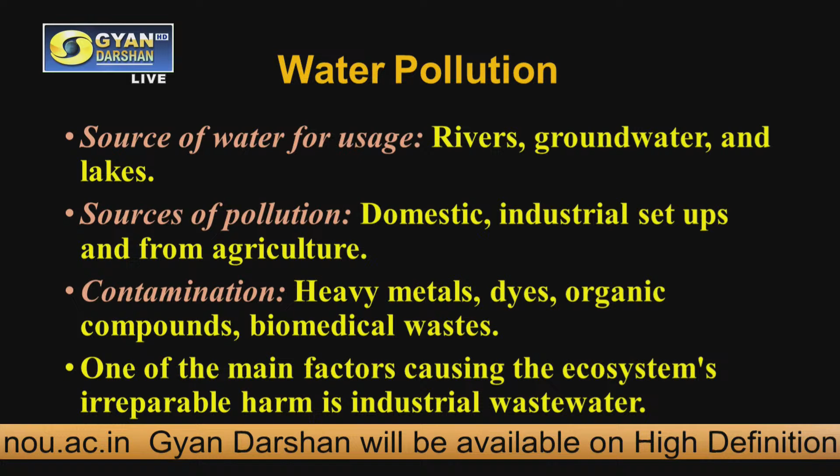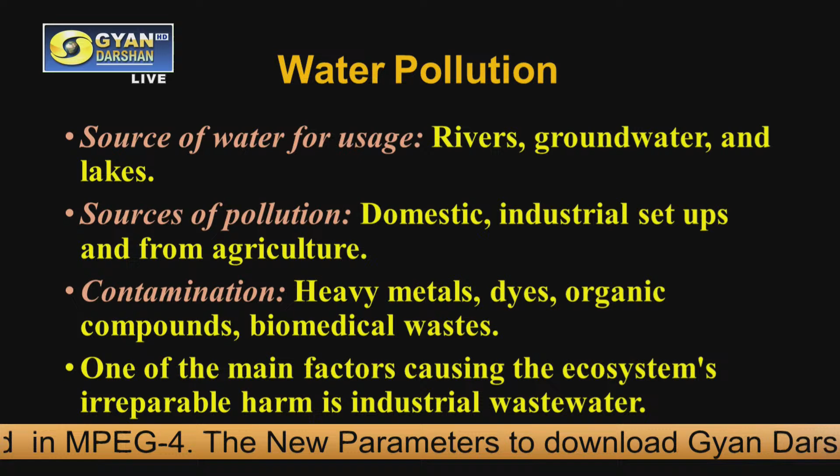This comes from rivers, groundwater, or lakes. In brief, the sources of pollution include domestic pollutants, industrial setups, and also the agricultural sector. Contamination of these waters could be due to heavy metals, organic dyes, organic compounds, and also biomedical waste which can enter the system through hospital waste and healthcare facilities. So one of the main factors causing irreparable harm to the ecosystem is industrial wastewater.

This is the state of our rivers today. Another case study: chromium and mercury are entering the residences of people in Kanpur. The soil, groundwater, and surface water in Kanpur Nagar, Kanpur Dehat, and Fatehpur were all found to contain heavy metals much above the permissible limits. This is again a report from Down to Earth, from the CSE, in December 2024, just 4 months before.

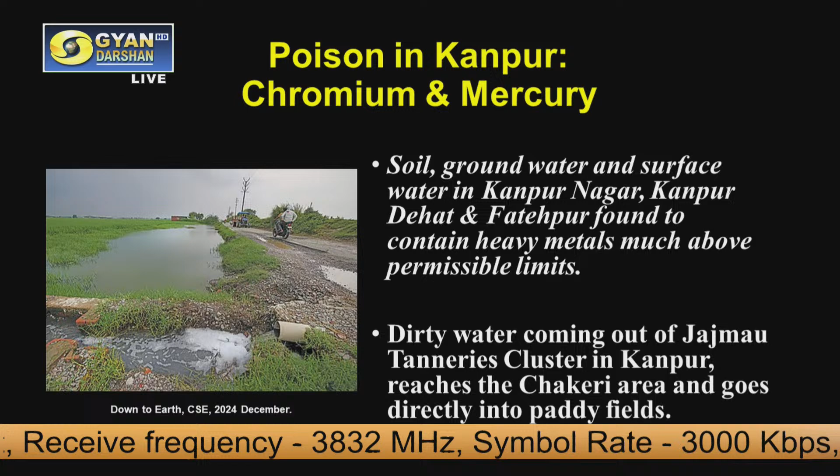The dirty water that comes out of the canals near the Jajmau industrial cluster area in Kanpur reaches a specific area, the Chakeri area, and then directly goes into the paddy fields where agriculture is being practiced. So what happens when these waters enter the agricultural field? No wonder the rice that is being grown there, or any other food item and agricultural product we get, is contaminated with these heavy metals.

So the food chain is affected and biomagnification occurs, with toxic chemicals being concentrated in the food chain. Human beings, animal health, marine health, plant health, environmental health - everything is being degraded. At what cost?

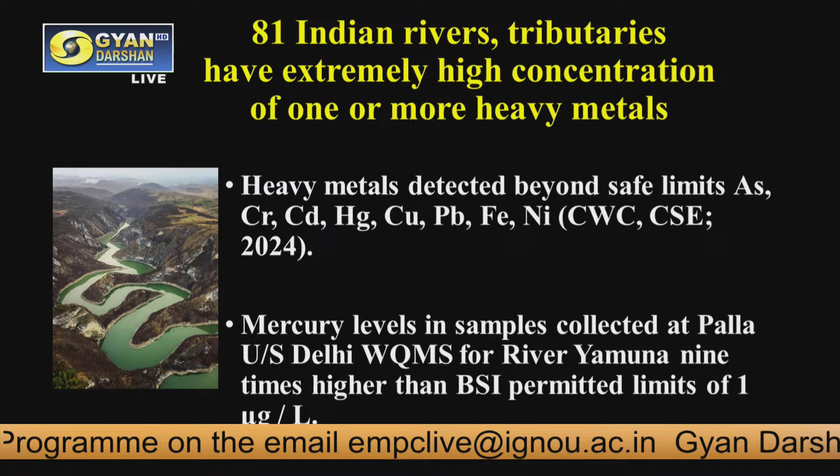See the next example: 81 of India's rivers and their tributaries have extremely high concentrations of one or more of the heavy metals. What were the heavy metals that were reported and observed? They include arsenic, chromium, cadmium, mercury, copper, lead, iron, and nickel.

This is again a report which came in August 2024 in Down to Earth, and the mercury levels collected in Delhi in some areas of the river Yamuna were 9 times higher than the Bureau of Indian Standards limits, crossing the permissible limits.

So having given you an outline of the present status and the recent reports and publications in the water and toxicological journals, we now have to understand that treatment of these water bodies, treatment of industrial or domestic wastewater from any industrial setup, is highly essential. And now let us see how we go about treating these toxic wastewaters.

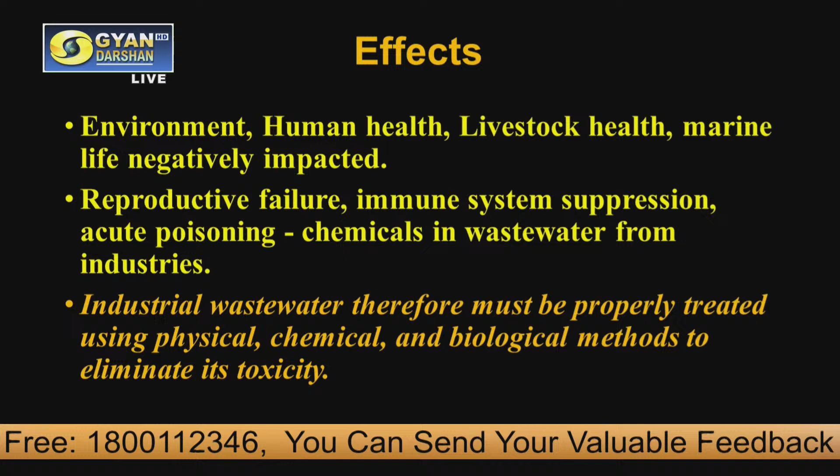The effects will directly affect the environment, human health, livestock health, and the marine environment; all are negatively impacted. Reproductive failure, immune system suppression, and acute poisoning are also reported in some cases. Why? Due to the chemicals present in these waters. Therefore, industrial wastewater should be properly treated using physical, chemical and biological methods in order to eliminate its toxicity completely.

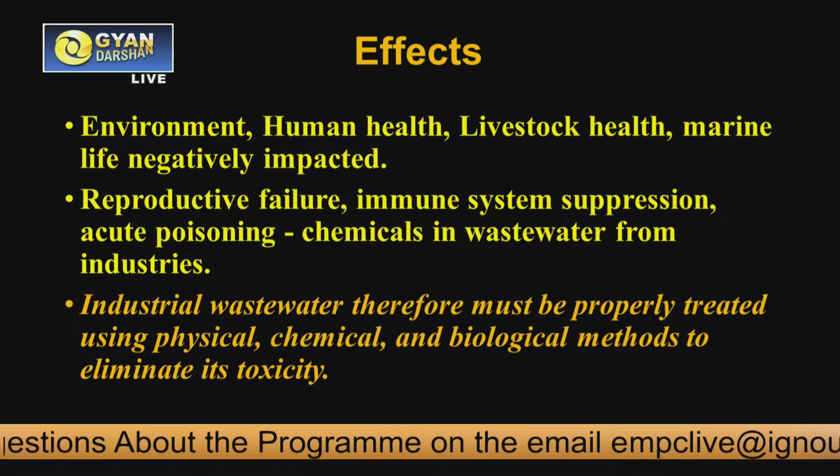Now let us see the characteristics of industrial wastewater. If we classify them into physical, chemical and biological, from the physical appearance you can see the color of the water. For example, if it is a textile dye, you can see whether the color is orange or pink, which indicates the level of pollution. Then the odor, the turbidity, the temperature of the effluent, and the total solids present in the waters.

Then the chemical oxygen demand, total organic carbon, nitrogen, phosphorus, chlorides, sulfates, acidity and alkalinity, the pH, and trace and heavy metal estimation form a very important part of the water chemistry parameters being analyzed.

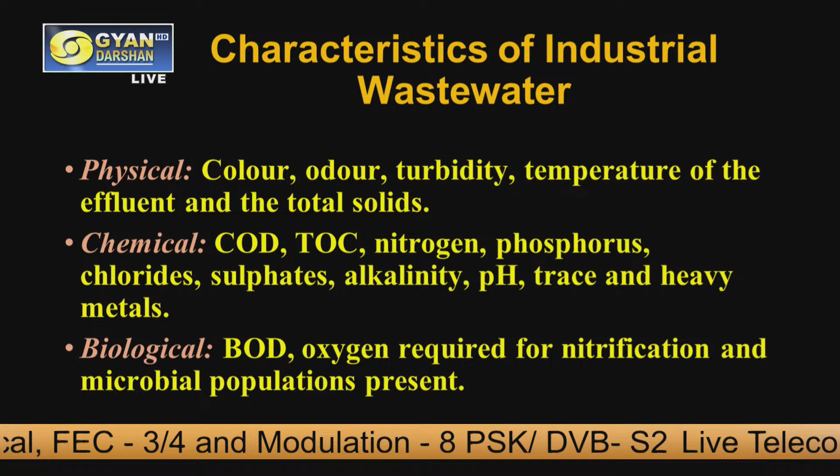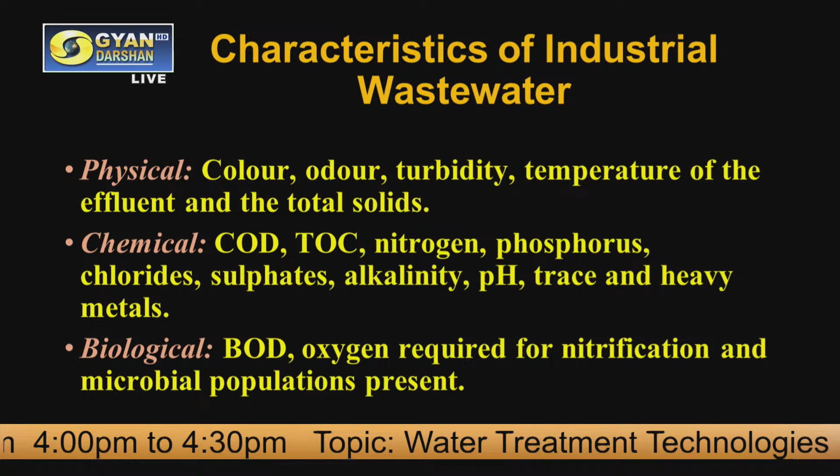And finally, in the biological studies, the toxicological studies are very important: biological oxygen demand, the oxygen required for nitrification, and the microbial populations present. All these parameters reflect the water quality, and thereby you can decide how far and how best you can treat these industrial waters.

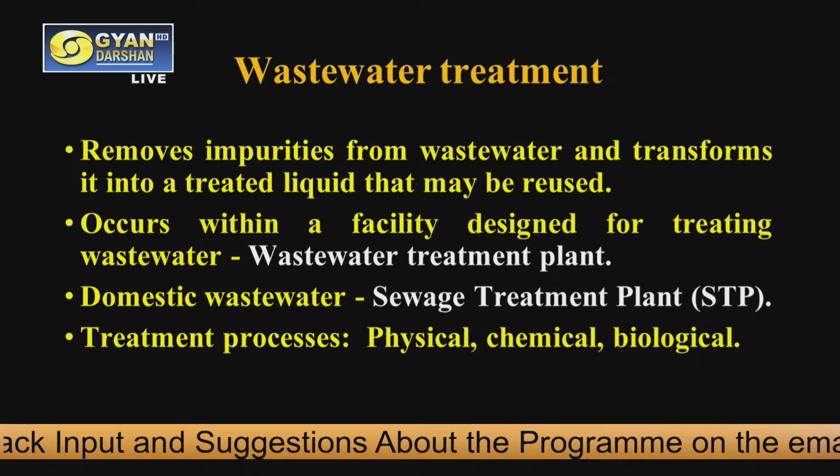So how do we define waste treatment? Waste is a contamination, which is contaminated or polluted water in the case of wastewater. This treatment procedure is a process that removes the impurities from the wastewater and transforms it into a treated liquid that may be reused.

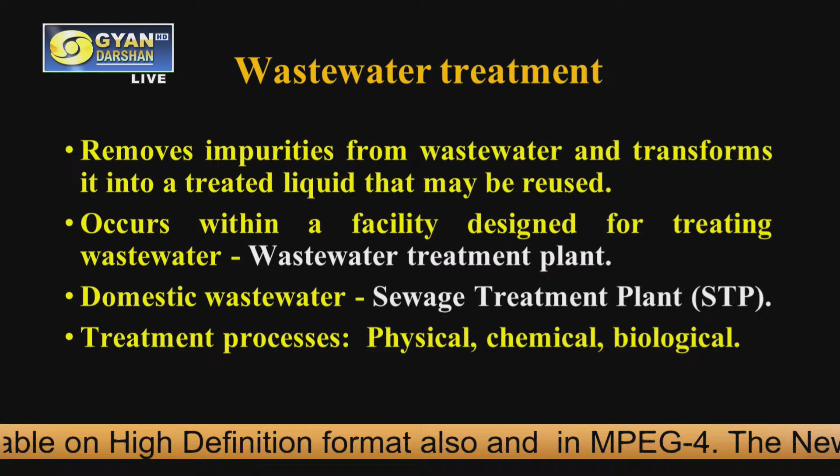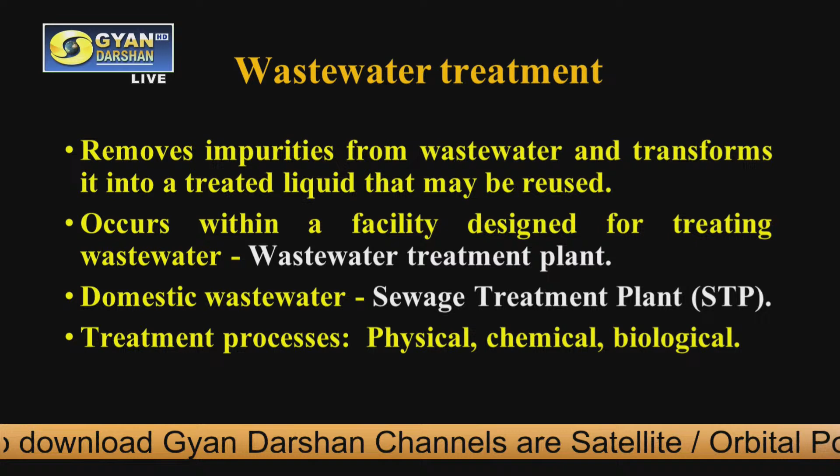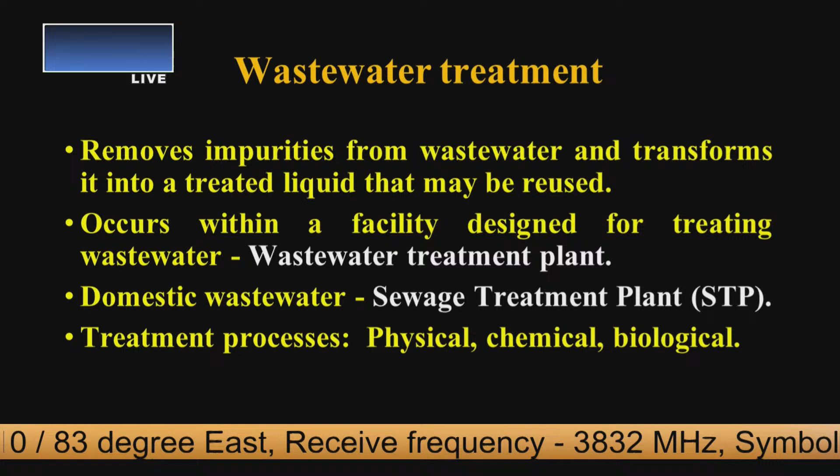This can occur within a facility designed for treating wastewater, often referred to as the wastewater treatment plant. If this facility treats domestic sewage, then we refer to it as the sewage treatment plant or STP. The treatment process encompasses physical, chemical and biological processes for effective elimination of the contaminants.

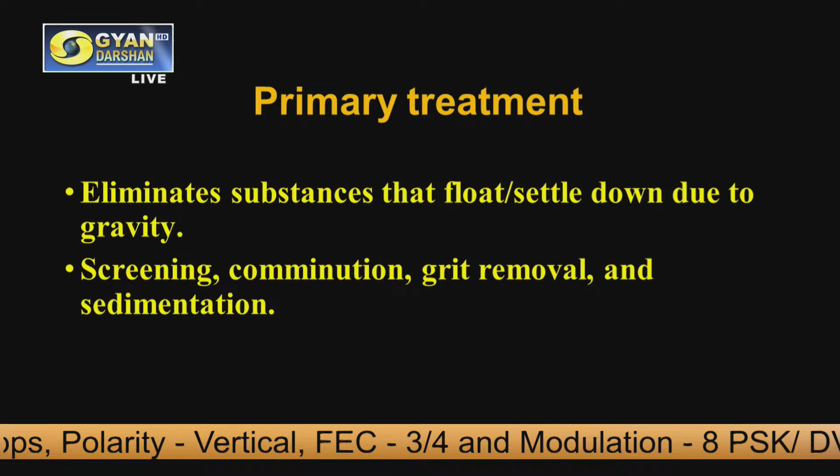Let us go on with primary treatment, the first step, which eliminates all substances that float on the water, for example oil or greasy substances, which can be skimmed away using certain tools and equipment. Then we have settleable solids, solid material which settles to the bottom of the tank or equipment, and can be taken out using certain tools.

So the primary treatment itself removes the larger particles, for example pieces of wood, leaves, twigs, or plastic material, and it can remove around 30 to 40% of the suspended matter and also the BOD.

Now, in the primary treatment process, we have several steps. The first step is screening. Then we can use comminutors, which grind or reduce the particles to smaller size for convenient removal. Then we have grit removal and the sedimentation process.

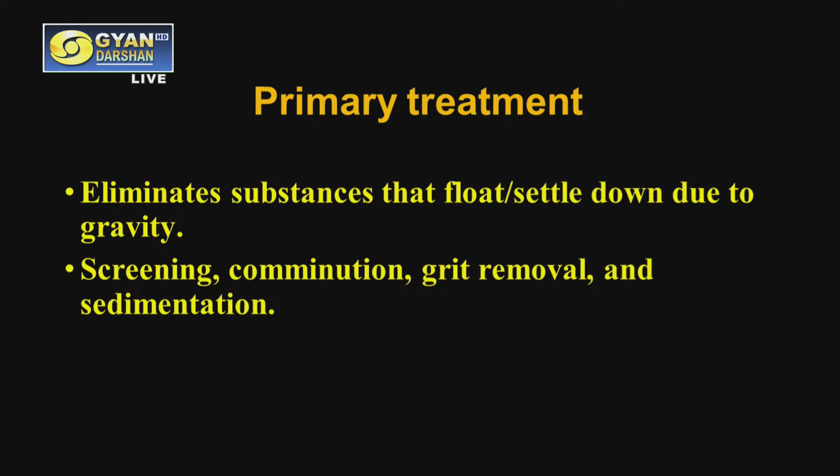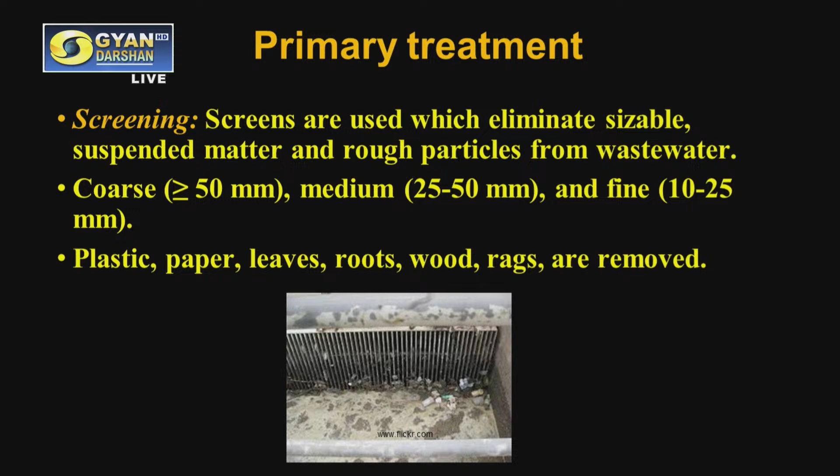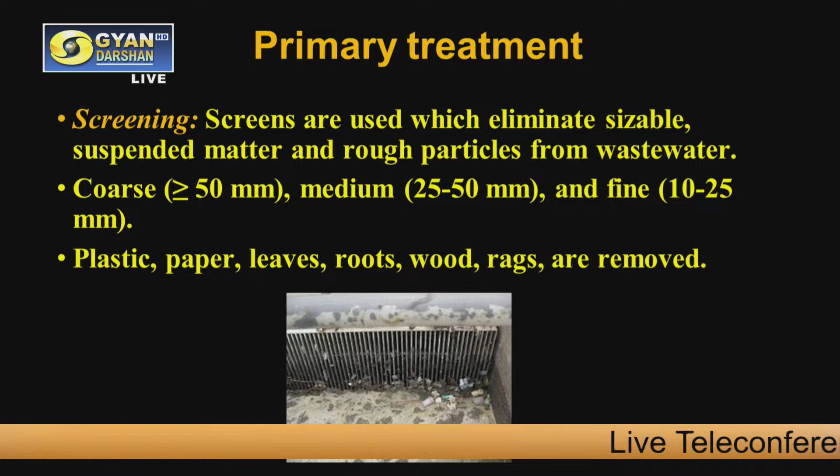So as I said before, the large or coarse particles like paper, plastic, and leaves, all that is visible to the naked eye, can easily be removed using this process, and this is the first step of the treatment procedure.

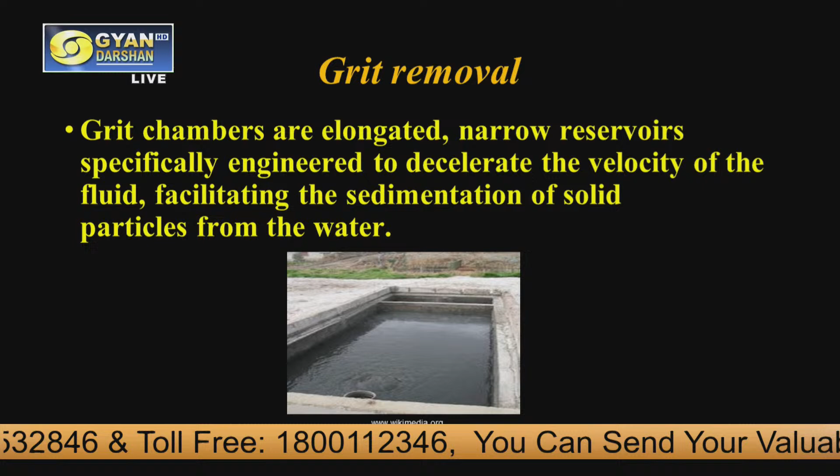The next is the grit removal. This is often done in grit chambers. Here you can see that these grit chambers are elongated and narrow reservoirs, specifically engineered to decelerate the velocity of the fluid which is entering, and that way facilitate the sedimentation of the solid particles from the water. When these particles have settled in that tank, they can be removed using certain equipment and tools. So this is the second step. After the screening, we do the grit removal process.

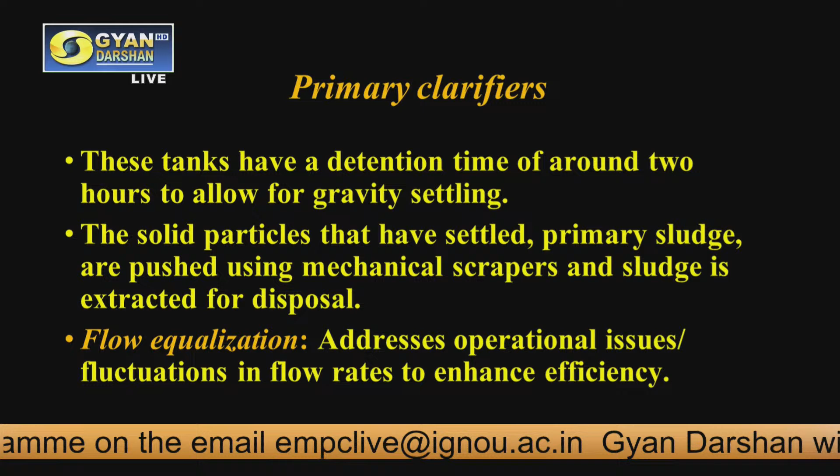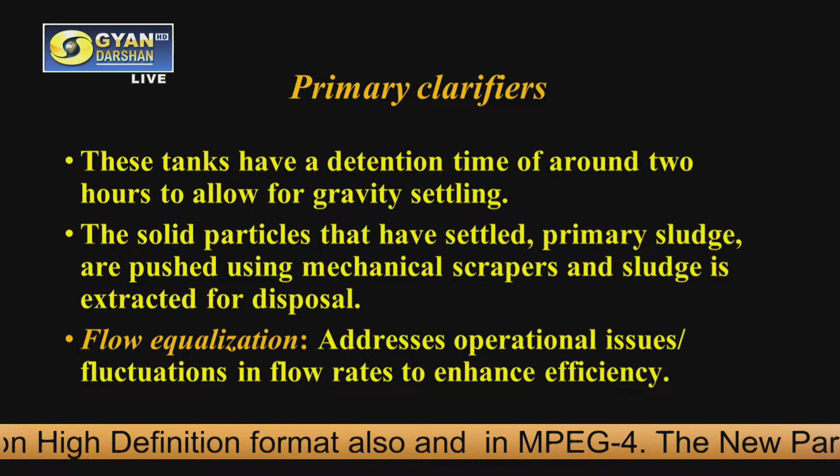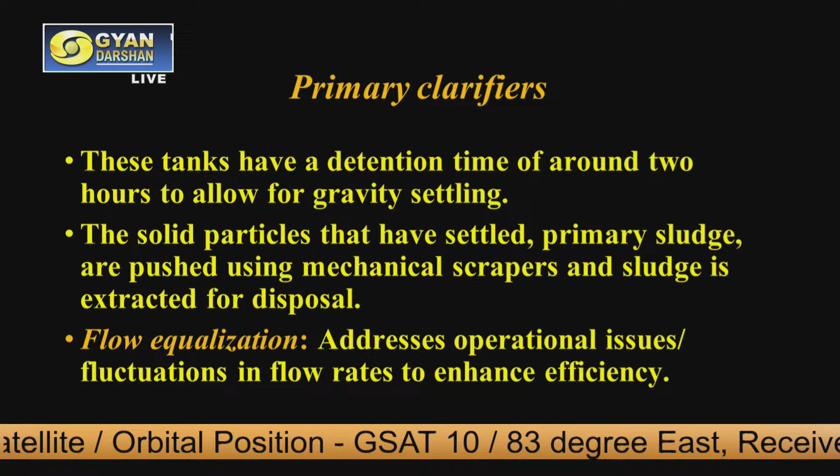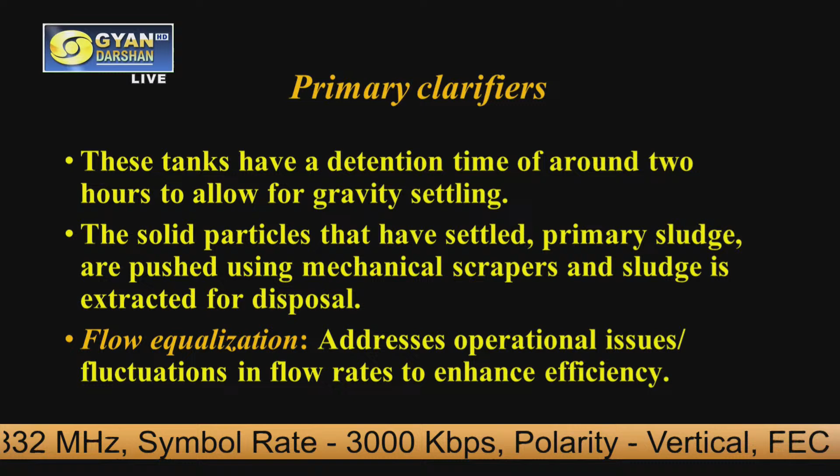After this, there are primary clarifiers. The wastewater moves on to these tanks, and here it is allowed to remain in the tank. There is a detention time of about 1 to 2 hours, and we allow gravity settling. The particles which are not filtered out completely can still settle down by the effect of gravity and then be removed. The settled solids form the sludge at the bottom, which can be scraped with mechanical scrapers and then extracted for disposal.

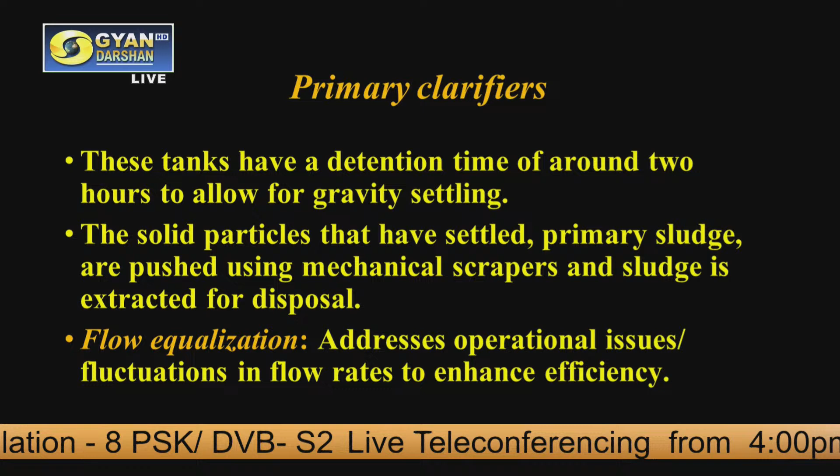In this primary clarifier itself, we have the flow equalization. This addresses certain operational issues, for example, the quantity of the flow of effluent entering the tank. Handling the fluctuations in the flow rate enhances the efficiency of the treatment process in total.

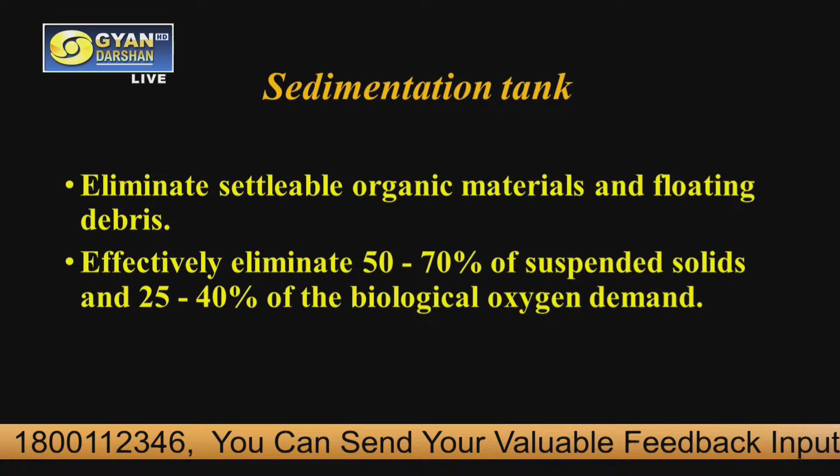Then we have the sedimentation tank. As the name suggests, sedimentation occurs and eliminates the settleable organic material and also the floating debris, and this can effectively eliminate 50 to 70% of the suspended solids and 25 to 40% of the biological oxygen demand. So in the primary treatment process itself, you have seen how many sub-steps and procedures there are, and this can eliminate 50 to 70 percent of the floating material and suspended solids, and also 25 to 40% of the biological oxygen demand with careful processes.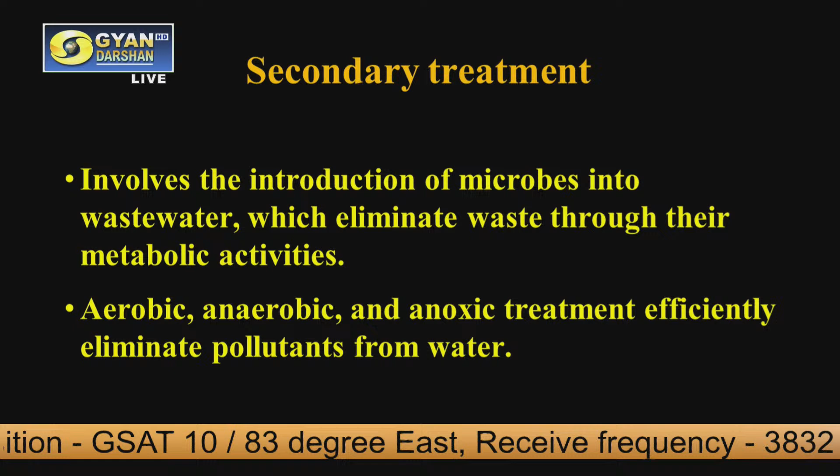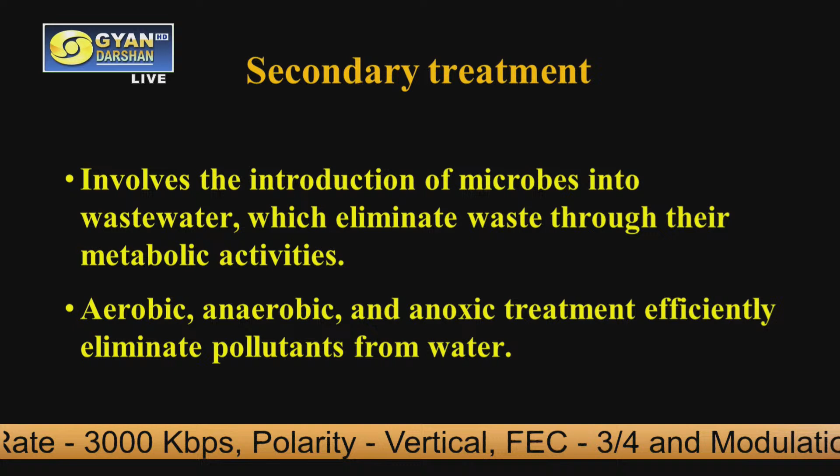The next step is the secondary treatment, which uses biological organisms for efficient removal. In the secondary treatment, 85% of the BOD will be removed, and this involves the introduction of live microorganisms and biomass, which can eliminate the waste through their metabolic activities. This encompasses aerobic, anaerobic, and anoxic treatment, which can efficiently eliminate the pollutants from the wastewater.

Now, under the aerobic system, we have two subcategories, and one is the fixed film systems. As the name indicates, the system we are using is fixed, and the microorganisms are attached to coarse material. It could be rocks in the tank, or some plastic material seeded with the microorganisms, and when water flows over it, the microorganisms through their metabolic activities convert the organic compounds into simpler ones, and thereby the waste can be effectively treated and the toxic waste eliminated.

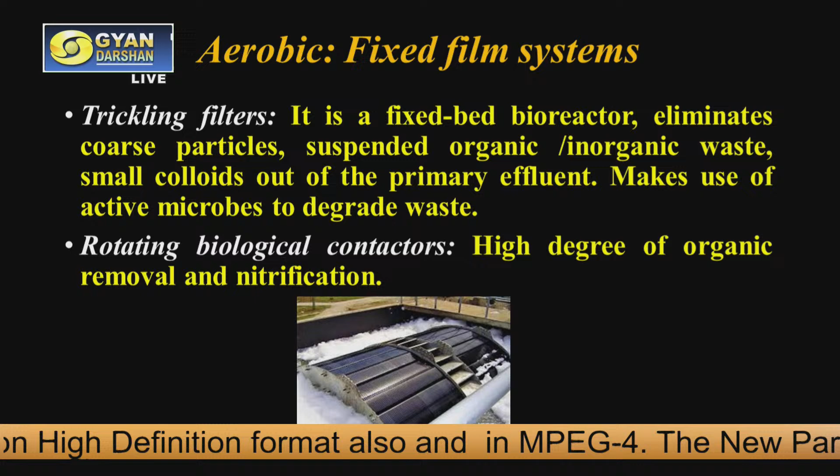In this, the first one is the trickling filter. So this looks just like a sand filter, and there is a tank, and it is a fixed bed bioreactor. This will eliminate the coarse particles. There is suspended organic and inorganic waste and small colloids of the primary effluent. All this can be successfully removed.

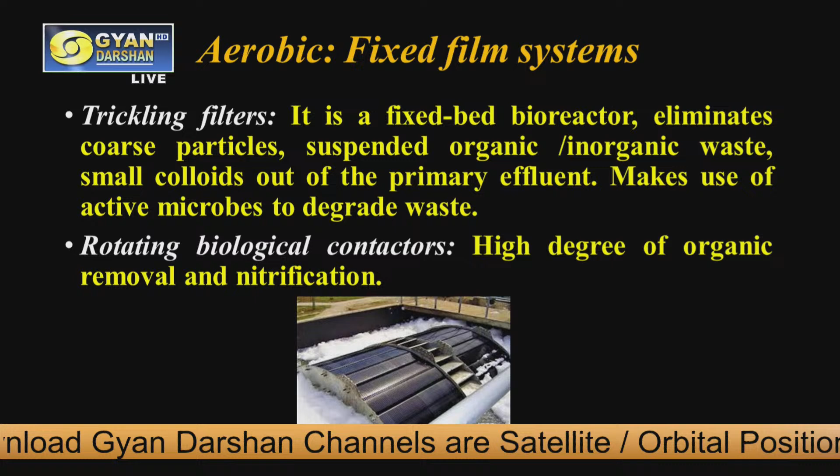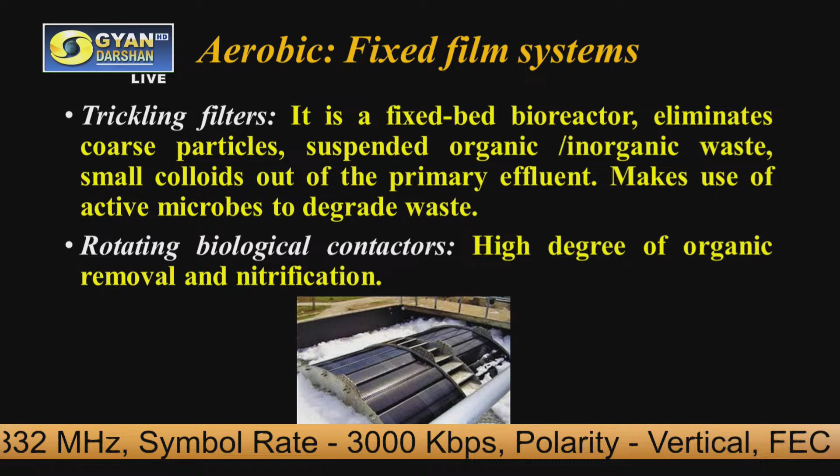And here, as I said, inside the tank there are some coarse stones and pebbles which are kept, and on that the microorganisms can be seeded, and when the wastewater is poured from the top of that tank, then that trickles down slowly, and then that will interact with this fixed bed bioreactor, which has the microbes which are seeded into it, and then the waste can be degraded, and then the sludge can be collected, and then it can go on to the next step for the clarification.

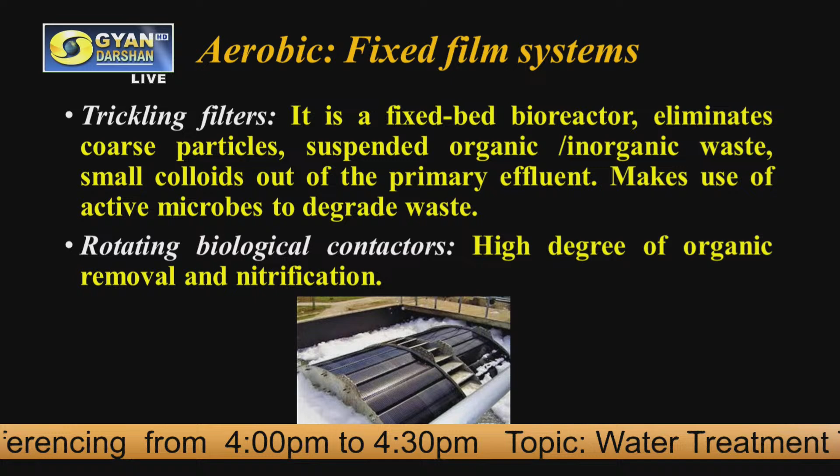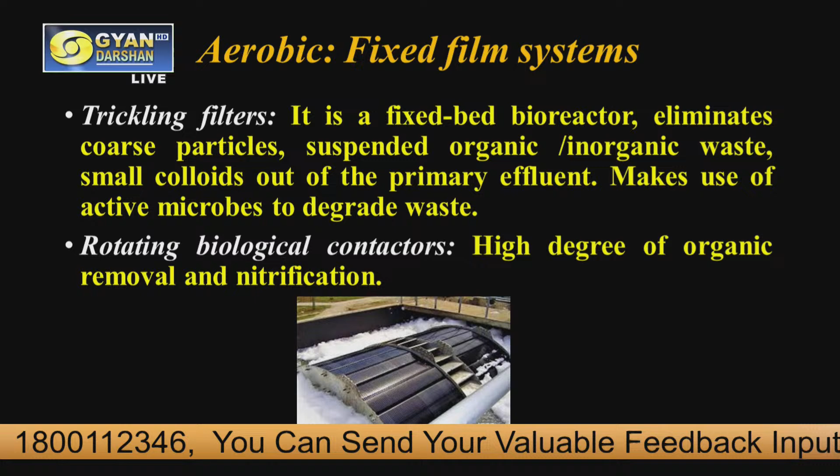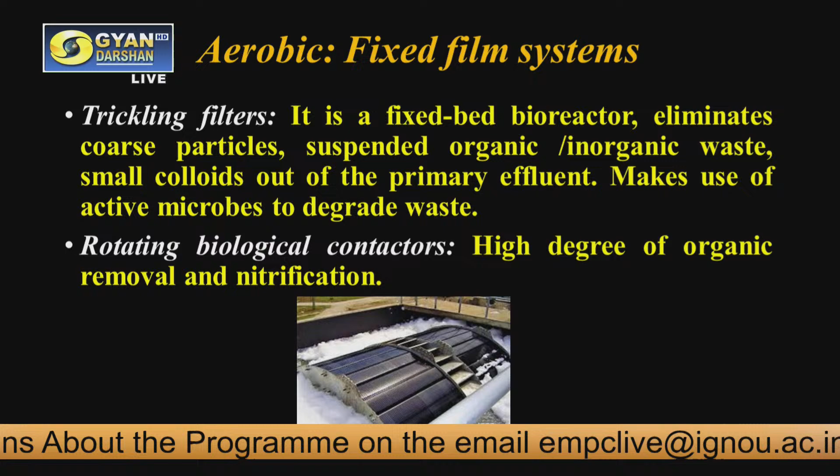In the same way, there are rotating biological contactors. Here a high degree of organic removal and nitrification can be carried out. Now in this rotating biological contactor, you can see that this has a series of discs which are attached to a shaft and a motor, and this rotates at right angles to the wastewater which is entering into the system. So thereby there is also continuous aeration, there is oxygen entering into it, and due to this the microorganisms are seeded onto these shafts and the systems, and then they can eliminate and degrade the pollutants effectively.

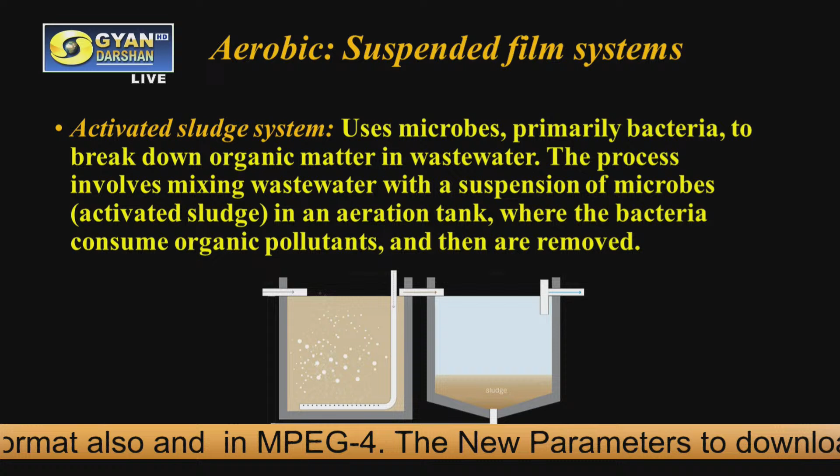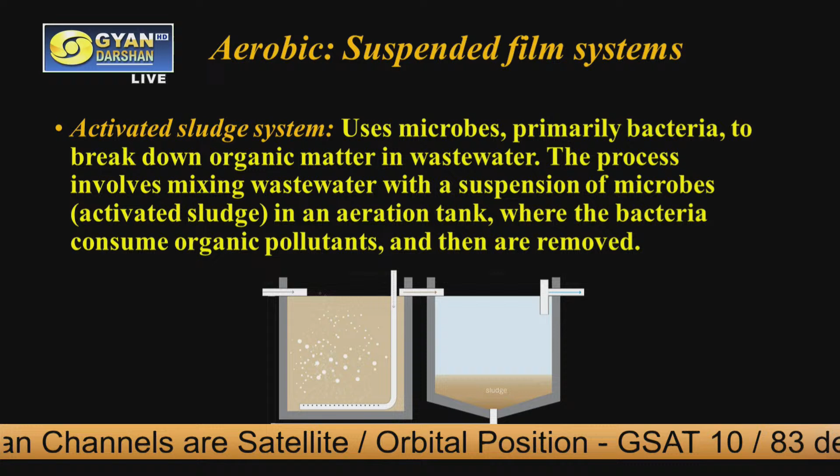Then in the aerobic system, so this was about the fixed film. The next in the aerobic is the suspended film systems. So here the first one is the activated sludge system. In the previous slides we have seen that the microorganisms were fixed to some part of the bioreactor. But here, in the liquid itself, the microorganisms are introduced. There is a stirring tank, and the air is continuously entering the tank, and the microorganisms which are seeded into this system will be continuously rotating with the help of the stirrer, and these microbes can then degrade the organic matter in the wastewater.

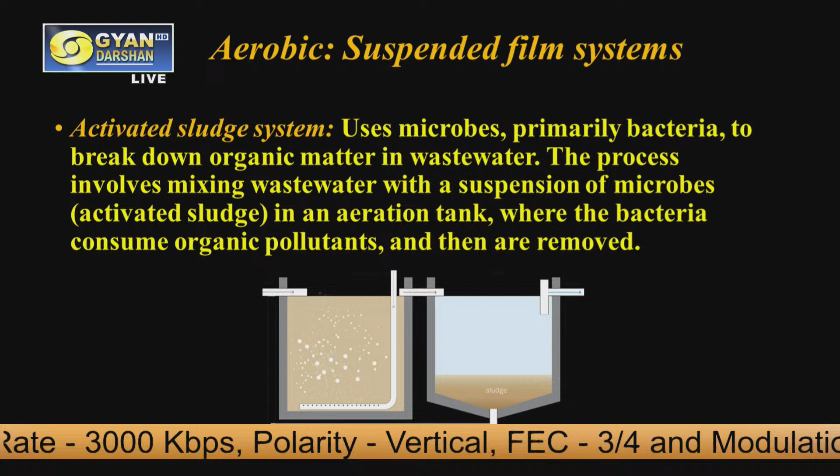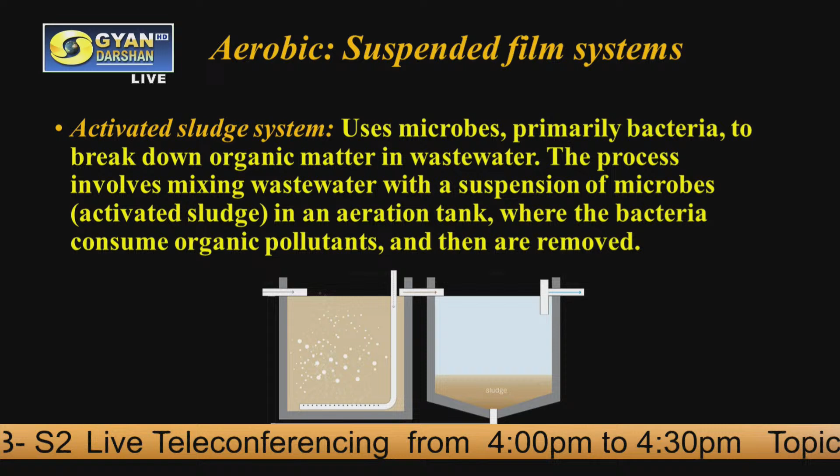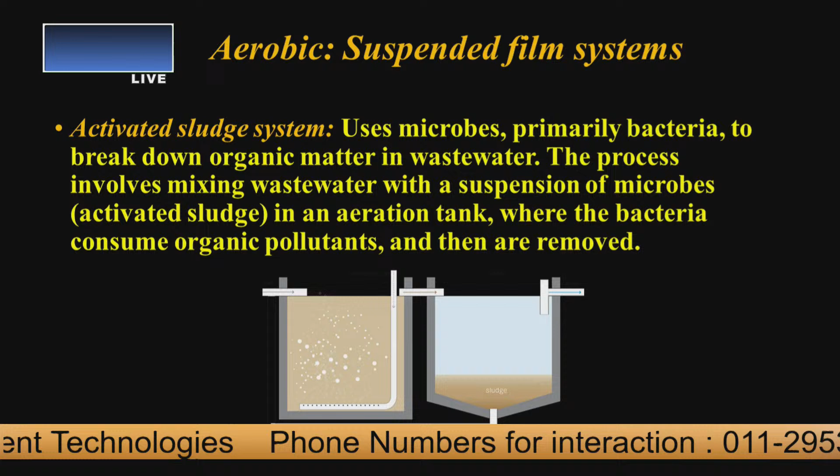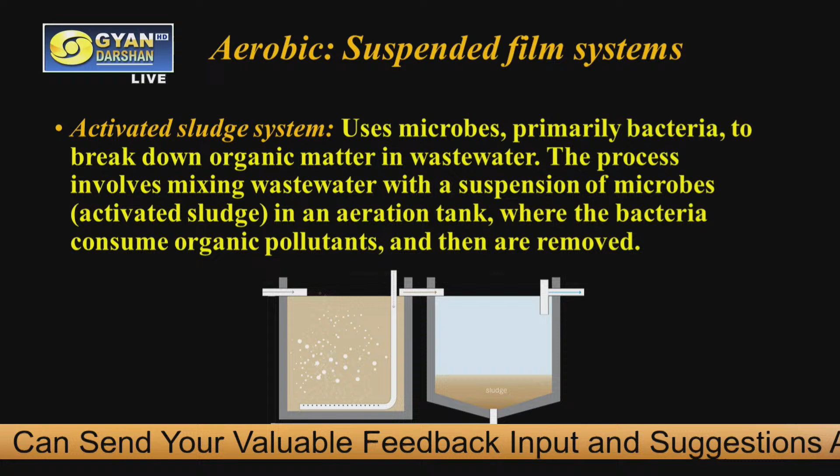And the activated sludge consists of the live bacteria and also dead biomass, and the sludge is also collected after the effective elimination of these toxic waste. The clear liquid is collected and it goes on to the next part of the treatment procedure, and the sludge, which is also referred to as the activated sludge, a part of it which is settling to the bottom, which contains these bacteria which are effective in removing the waste, is recirculated back into the aeration tank or the first tank, and this is also referred to as the recirculation of the activated sludge procedure. So this is a very good procedure for eliminating 80% of the organic waste.

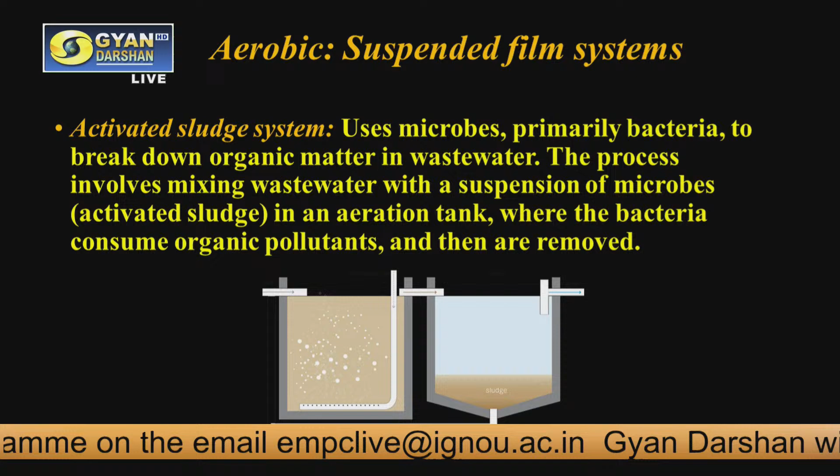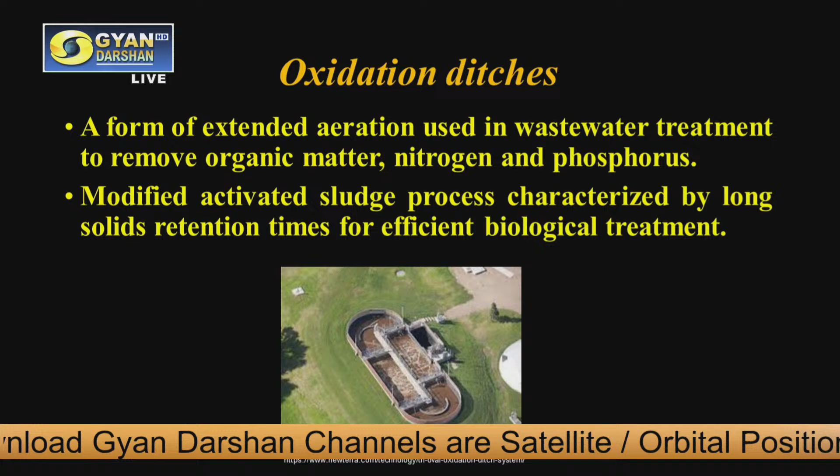The next in line with this is the oxidation ditch. So this is a system here you see in the figure, and they are large scale projects or large scale extended forms of the aeration systems which are used to remove the organic matter, the nitrogen and the phosphorus. And here there is a rotor which is mechanically operated, and again there is agitation, there is entry of the air and the oxygen, and it is basically a modified activated sludge process, and they have long solid retention time, and proper efficient biological treatment will be possible in such tanks.

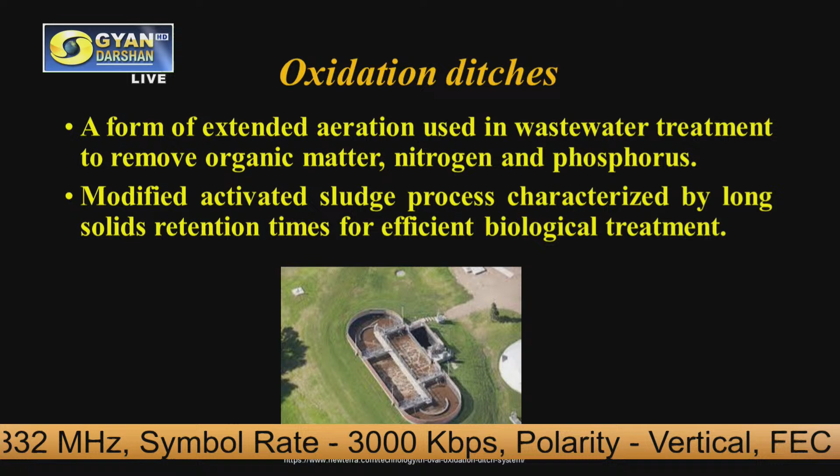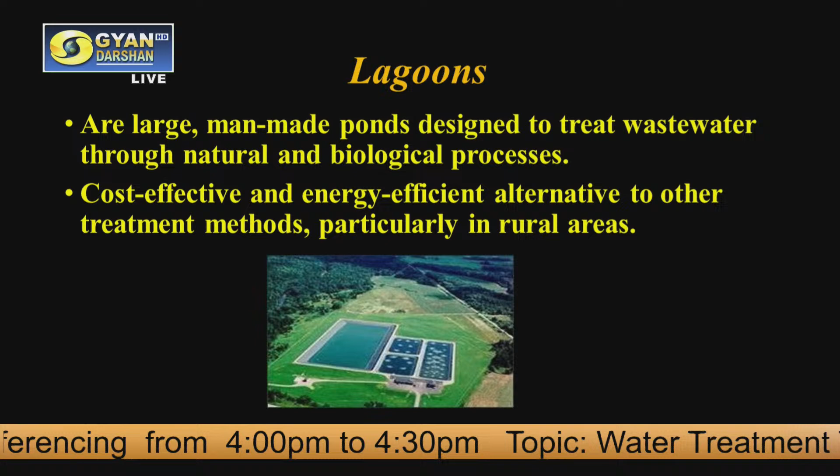The next is the lagoons. In this figure you can see that they are large man-made ponds, and they are designed to treat the wastewater through the natural process, also through certain biological processes. And the bacteria, for example here chlorella, then the cyanophyceae, certain algae are being used, and it is a cost effective, energy efficient alternative compared to the other procedures,

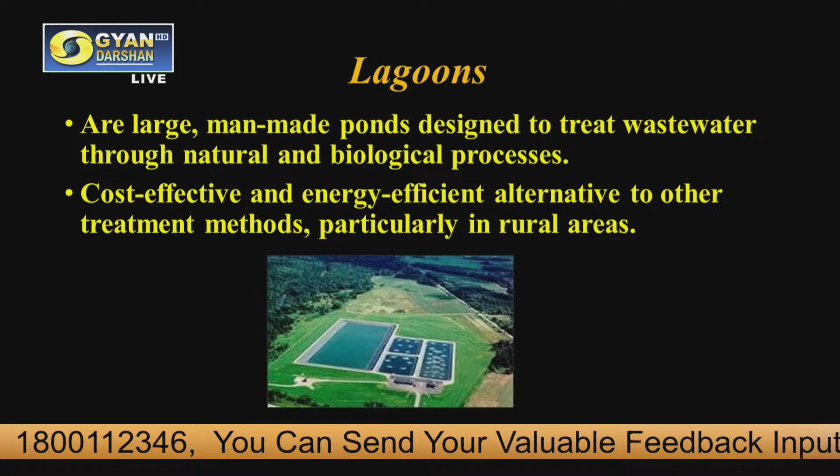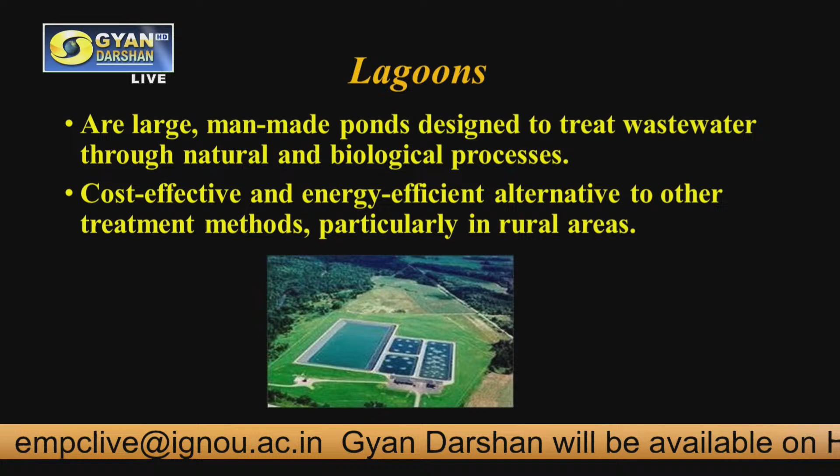because here there is no big equipment which has to be employed, but it is totally dependent on the sunlight, on the natural microorganisms, and long retention periods, like for months the solids can be allowed to interact and mix with the natural daylight, and that way photocatalysis and other processes occur, and that can definitely help in cost effective and energy efficient treatment of these toxic contaminants which are entering the water bodies.

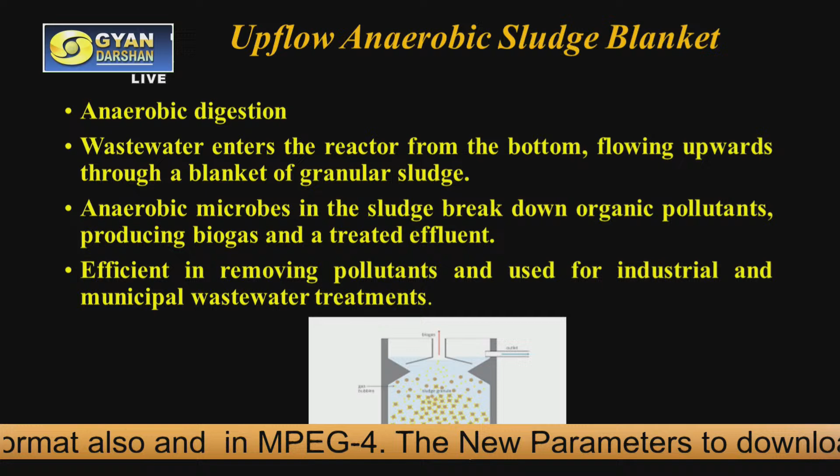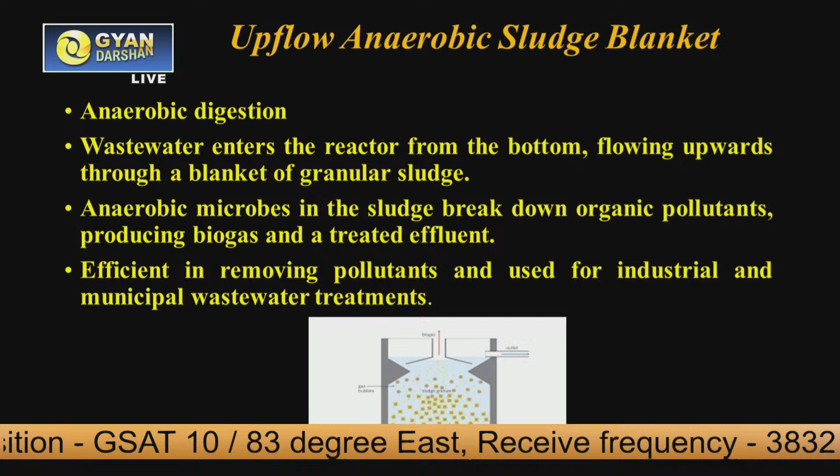The next is the anaerobic procedures. In this comes the upflow anaerobic sludge blanket, or the UASB, as it is referred to in short form. So this is an anaerobic digestion process. The wastewater enters the reactor, as shown in this figure, from the bottom of the equipment and flows upward. That is why the name refers to upflow. So the wastewater goes upwards through a blanket of granular sludge.

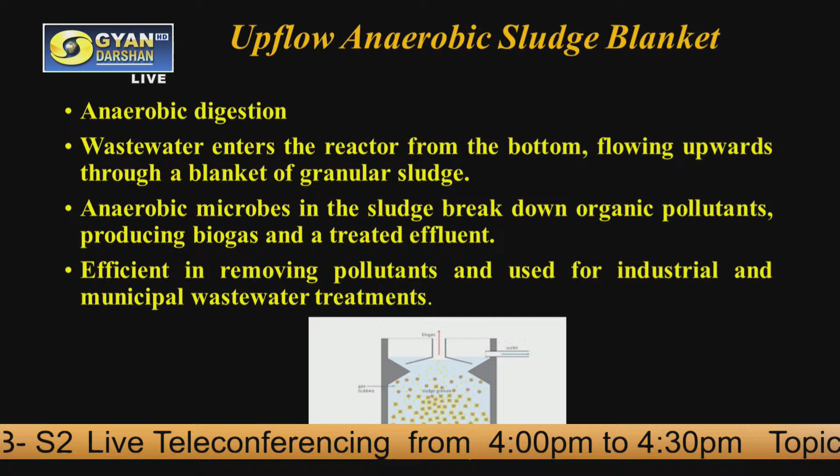These anaerobic microorganisms break down the organic pollutants. The first step is acidogenesis, where the acidogenic bacteria thrive and an acidogenic environment is created in the tank. After that, acetogenesis occurs, where acetate is produced, and then methanogenesis occurs, where methane and other byproducts are released; the methanogenic bacteria thrive there, and biogas is produced. This biogas can also be used for other processes. This is highly efficient in removing pollutants and is used efficiently for industrial wastewater and also municipal wastewater treatment.

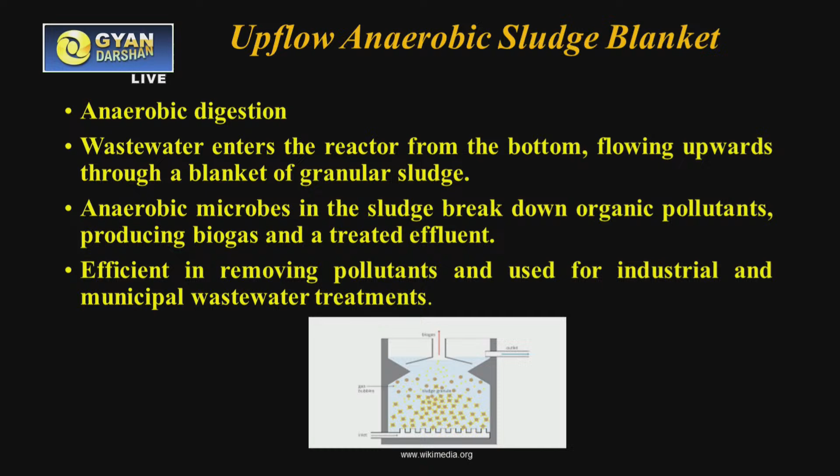Finally, after the primary and secondary treatment, we come to the final stage, the tertiary treatment procedure. Once all the BOD and some of the physical and chemical pollutants have been removed, another step involves disinfection of the water, so that it can be recycled and reused effectively. Tertiary treatment ensures that parasites, microorganisms and inorganic chemicals are completely eliminated from the system. It employs adsorption, membrane filtration techniques, nanofiltration, enhanced filtration, ion exchange, and reverse osmosis, which are highly effective for tertiary treatment.

The first step is disinfection. Even at home, when water is supplied, sometimes you feel that the water is chlorinated. Chlorine is a bleaching agent, highly effective in removing germs and microorganisms, so adding chlorine to the final effluent helps in disinfection, a crucial step in wastewater treatment. For decades, disinfection happened through chlorination. Later, we extended this to membrane filtration, ultraviolet rays, ultrasonication, nanofiltration, and ozonation, which are highly effective for disinfection.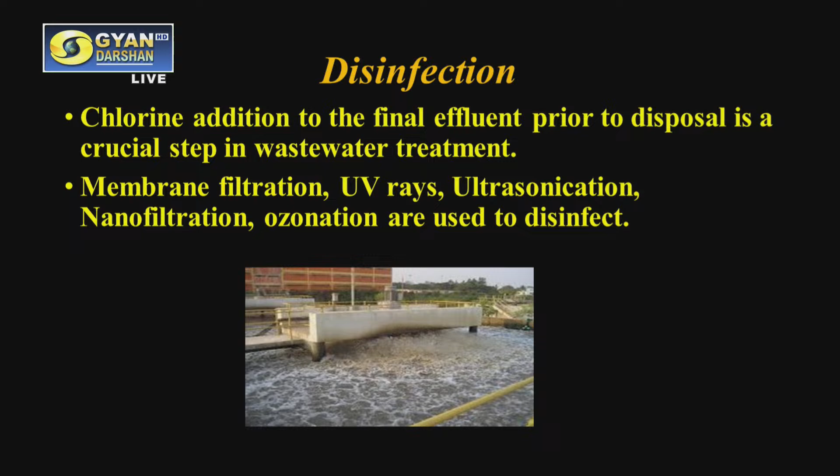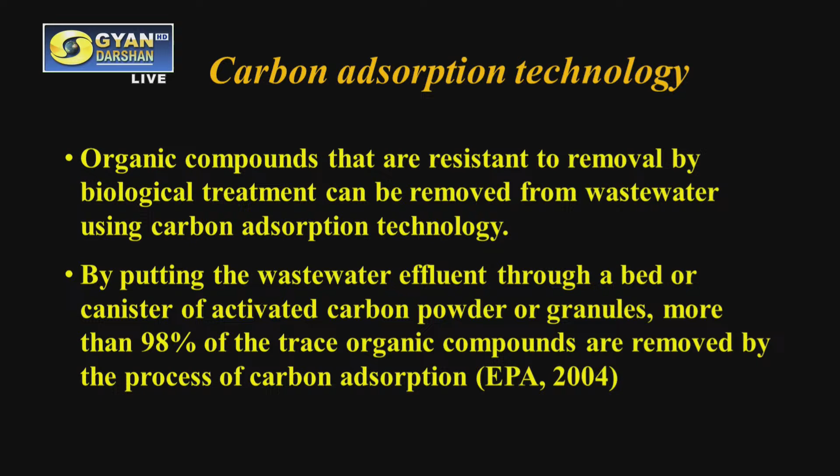Then came carbon adsorption technology, where organic compounds are removed using activated carbon powder; when the water falls over it, many contaminants are effectively removed through adsorption. Recently, phytoremediation uses plant species like Centella asiatica and Ipomoea aquatica, which help in bioremediation of heavy metals and water pollutants from the soil. This can be effectively done using phytoremediation techniques.

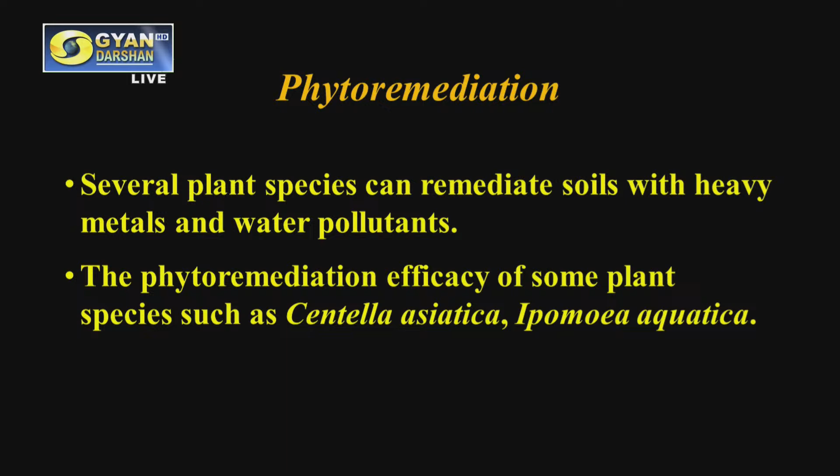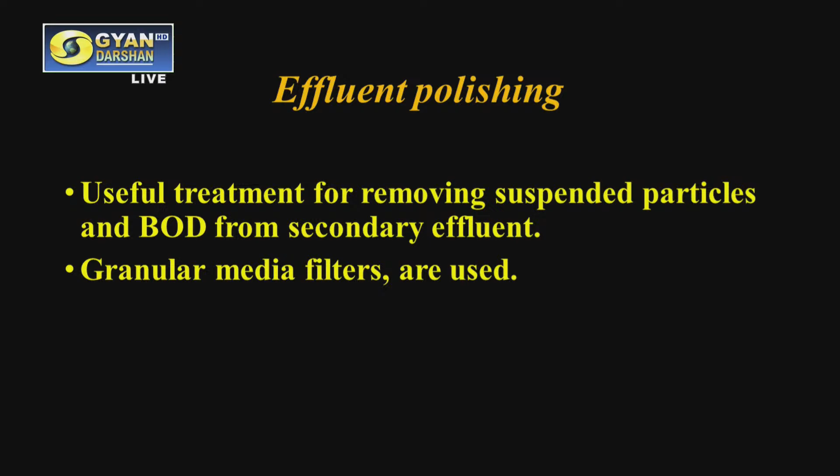Finally, effluent polishing is also used in treatment, and it is very useful for removing suspended particles and biological oxygen demand from the secondary effluent. Here, granular media filters are used, and effluent polishing is a fine technique for treatment.

My dear students and learners, today we discussed water treatment technologies: the primary, secondary, and tertiary treatment technologies available to treat and disinfect primarily industrial wastewaters. We also discussed in the introduction the state of India's rivers and how they are polluted with toxic heavy metals. Therefore, treating these industrial waters is very important. It is highly essential and mandatory, and laws and policies have to be fixed to achieve 100% success rates.